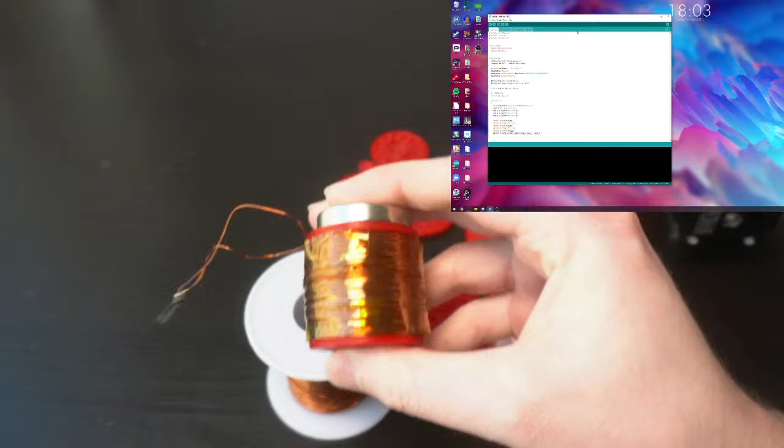So first thing, I guess, more coil winding. Where is my first one? So here's the goal, that is like 2100 turns. So I gotta make 3 more.

Luckily, Mr. Stepper Motor here is gonna help. So I've just got this hooked up to one of my OSR control boards, and it's just running a pretty basic script where I just tell it in serial how many turns I want, and then it spins. Zero control of speed or anything, so hopefully it's still okay. I don't remember which way it spins, so we'll figure that out.

And then, yeah, so I need to get some tape. And I think that should be it. Oh, I got tape, okay. My sound is no longer doubled, hooray.

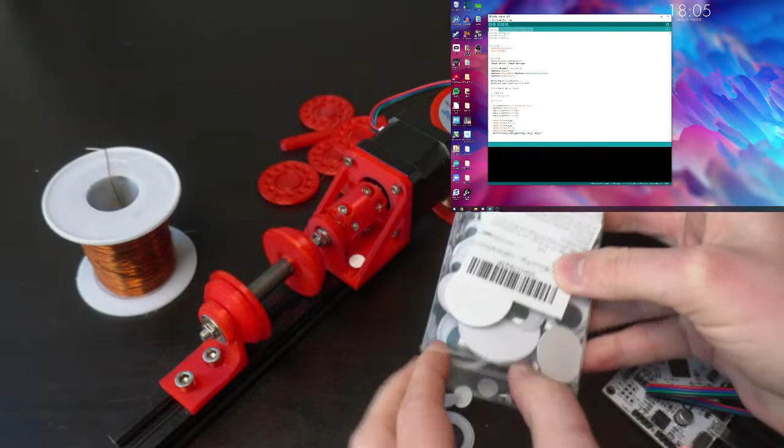Where's all the small ones? There we go. Okay.

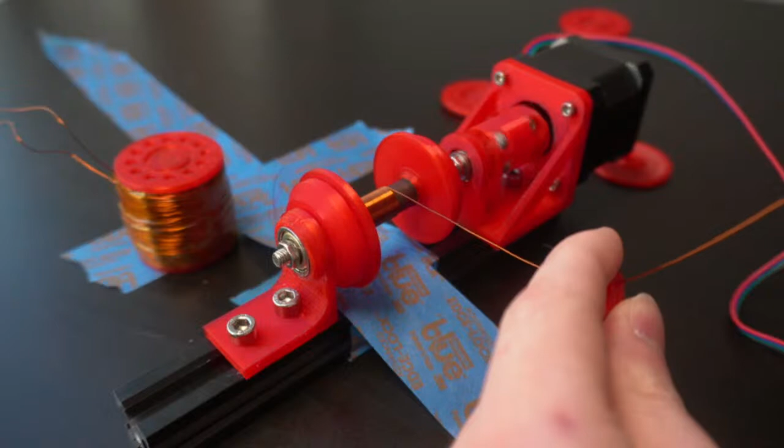Oh, that looks good. It's gonna be a complete mess by the time I get like 2 more layers up, so don't get your hopes up. I'm impressed I got it good for this long, honestly. Yeah, it's falling apart. Oh no.

All right, going for 500 more. It's doing its own thing. I tried. Oh, that right side looks so good. Wow. And then the left side is just a mess. It's fine.

I genuinely wonder how much that affects the efficiency of this thing. Like, if I could perfectly wind it, fully machine controlled winding, it's got to be better, but how much better?

Yeah, automated feed gate. I wanted to do that, but I honestly didn't even want to build this winding machine until I tried to wind a coil by hand and realized after half an hour and only like 200 turns that it really sucks. So this was the least amount of effort I can put into it, and yet I still designed these custom spools with this fancy interface because I wanted them to have flat ends for my application, which I guess I should explain too, because it probably isn't obvious.

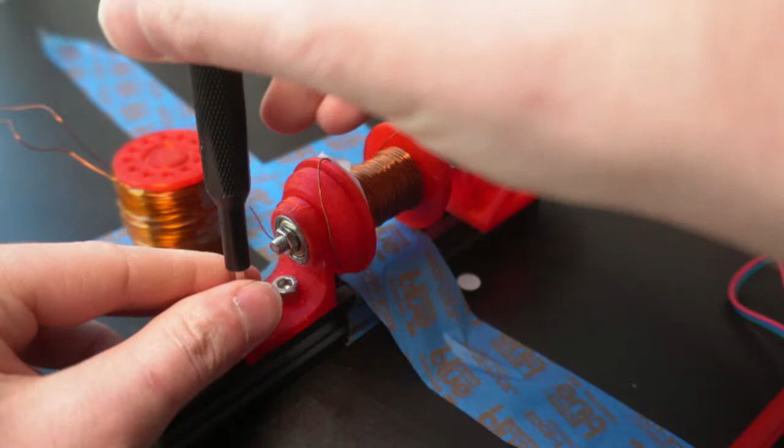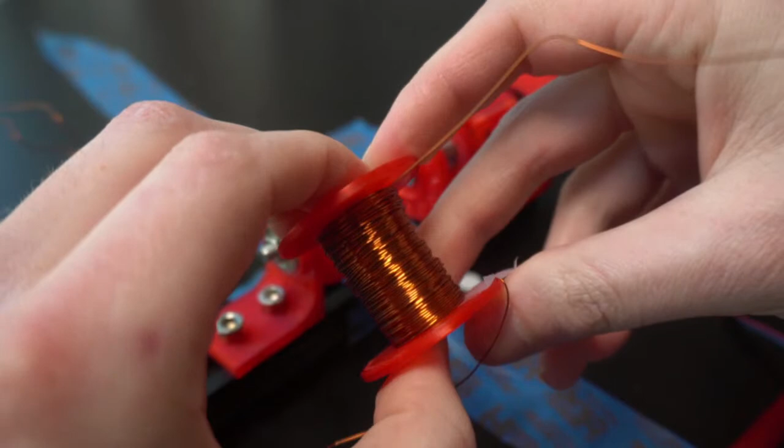All right, so now this thing is going to want to fall apart, because everything I build likes to fall apart. No, it's just because it's broken. Yeah, so here you can kind of see we're... yeah, this end cap just came off. So should I even bother trying to glue it now? Probably. Yeah, I shouldn't let my problems get worse than they already are.

Just gonna back this up a little. So now I gotta be a little careful because it will 100% want to expand because of all those tightly wound coils, and I don't want it to. Oh wow, that actually just ripped off the plastic. Nice. Alright, so I'm just gonna globby globby glob. This is how you fix problems.

Okay, we're going to let it dry in the jig. And we're going to drive from the other side so that hopefully the other side has a strong enough connection, or at least a slightly stronger connection.

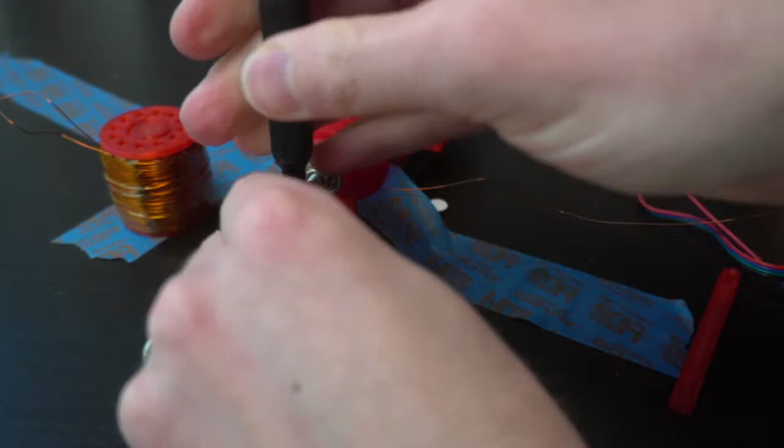Oh, cool, well thanks. I'm just doing my thing, but anybody can do this, honestly. It just takes enough dedication and time to learn and try and fail and be okay with lots of failure.

Take right now, for example. I'm failing, and yes I can recap what I'm doing. So I am winding coils for an electromagnetic levitation platform that I'm building from scratch, which is going to be like a fancy microcontroller version rather than the ones you buy now, which are kind of toys and are fully analog, zero control.

So yeah, we got a coil here, and we're just trying to match that. Originally I wanted to wind all 4 coils, but that is clearly going to take far too long. So we're just going to do this one, and then move on to testing it, and then some CAD stuff. Glue fixes everything.

Glue is glue. All right, so we are at 700.

I'm just going to do 1 and make sure it's now spinning the correct direction. Huzzah! And we should be good to go.

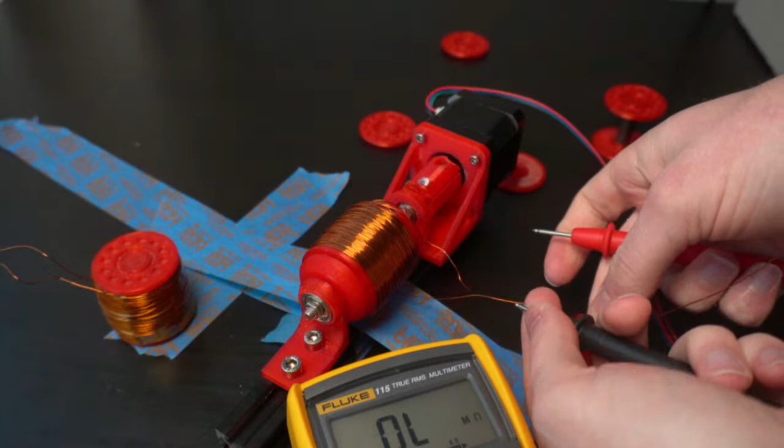What I was thinking was after I get this project going a little further and test a few things, and I'm pretty happy with it, I was going to move over to CAD. And then I started the rather ridiculous task of building yet another open source robot arm, because I want to build one to put a camera on, because I think that'd be real cool.

Alright, so this is a poor connection. I should just get a lighter and do this properly. There we go, 21.7 ohms. And the other one I have is 22 point something or other, 22.2. So 21.7 to 22.2, so yeah, we'll need, I don't know, I'll do 100 more winds and see where that puts us. That might be too many, I'll just do 50.

Knife's name is Knifey. You wish. Knife doesn't have a name, because I don't name inanimate objects. Oh, what a mess.

Man. This one could have gone a little better, I think. Oh no. Come on. This is the one place it can't be.

All right. So, you ready for this? Oh, actually, well, I need the camera to show the first part of this, but I'll pull this up. Alright, let's see if the camera wants to turn back on. Camera? No. Okay, well, you'll have to use your imagination.

So yeah, I don't know why, but last night I was just like, you know what, I'd love to build a robot arm. And yes, there's a ton of open source designs out there, but none of them were made by me, so I want to build one. That's honestly the entire reason.

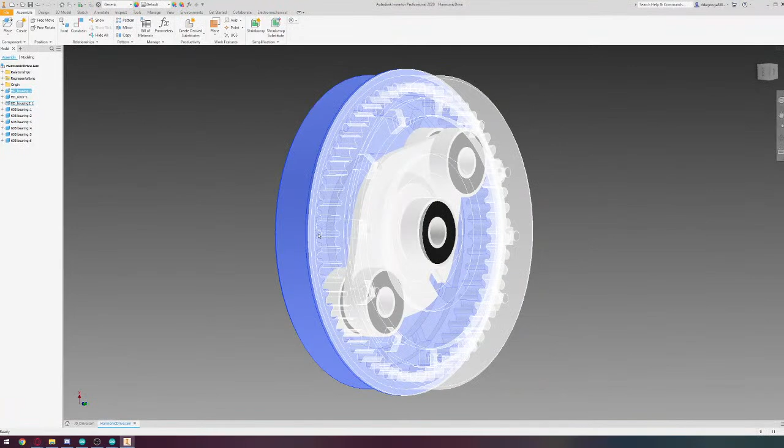So what I have so far is a harmonic drive unit, which is using, I forget what the name is, like the flex spline, I forget, there's an actual name for this. But anyway, it's a little hard to tell what's going on from this. But essentially the number of teeth on this one and this one don't match. This top one has 2 teeth more. Or wait, why does it have? Oh no, it doesn't have the same.

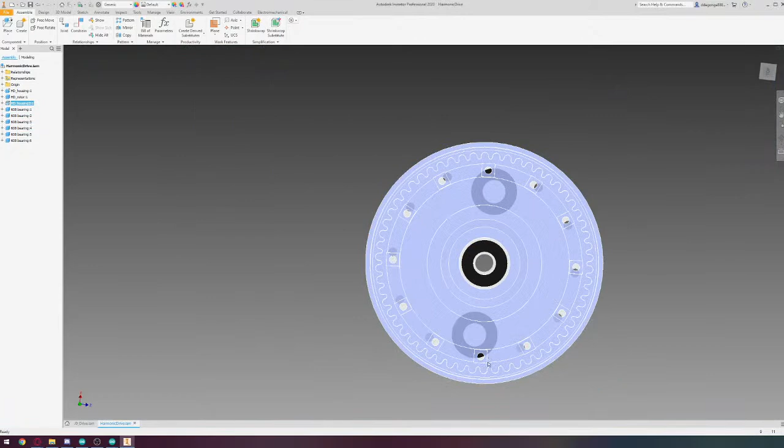Yeah, so, and then there'll be a belt here that's kind of inside out, so teeth facing out, and that belt's going to stretch around these 2 bearings. So as this input spins, you can see the teeth will line up as the bearing goes past, and then they'll misalign. And the output spins, I think it's a reduction of 29 to 1. So pretty good.

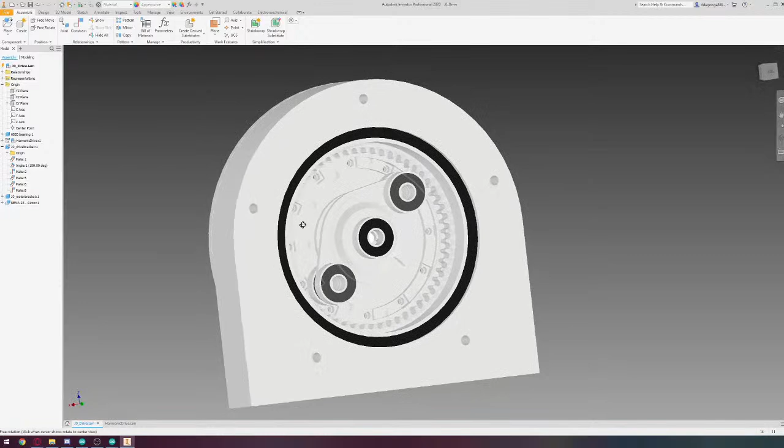And it's using pretty much all cheap off-the-shelf parts. It's a HTD5 belt, 608 bearings. The only kind of expensive part is we need a real big bearing here, which is a 6820, which apparently they're only like $15 on eBay. They must be really out of spec or terrible or something. But that doesn't really matter for open source robots.

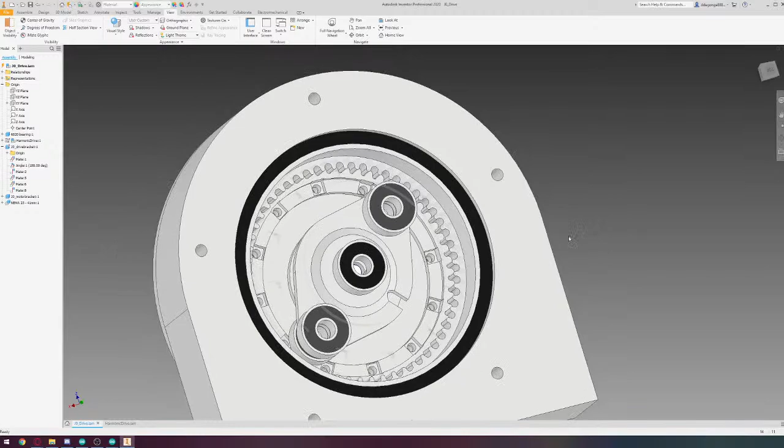So yeah, big bearing there. Have a NEMA 23 that's coming in here, and it's going to connect to the little funny shaped inner piece. Oh, I forgot, Inventor always defaults to no outline, so it's hard to see stuff. But yeah, NEMA 23 directly inputting to that spinning part in the center, and then crazy gear down. So it should be pretty good.

So this is going to be one part of the base, and then I have, where is it? Okay, I'll have to find it. And projects. Yeah, this project is called the OS ARM, because I have the OSR control board. So OS ARM, it's a pirate joke.

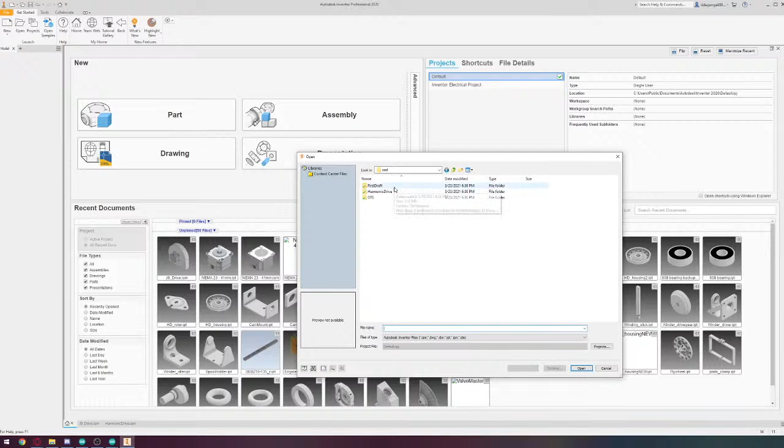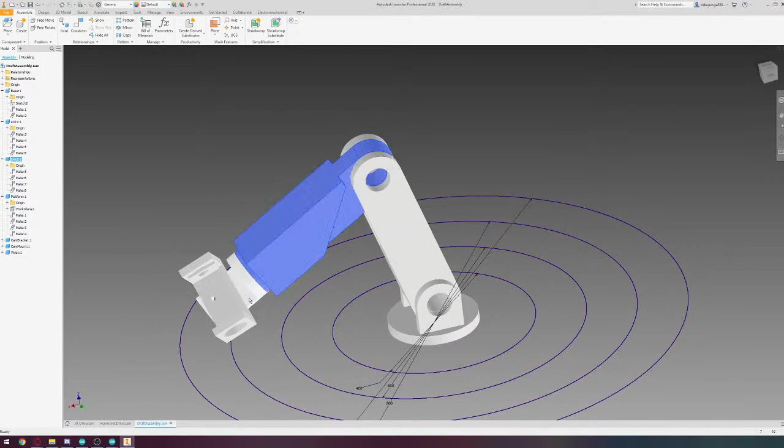Here is the actual mock-up kind of assembly. So I don't know if I'm gonna make it quite this chunky, because that's gonna be a lot of plastic. But the hope is to do like pretty much fully 3D printed, have a decent payload, maybe around 1 kilogram, a pretty good range, 500 millimeter radius. Actually, this is quite a bit further. I might scale that back a little.

And then it's going to be 6 degrees of freedom. So we've got rotational base, first hinge joint, second hinge joint, a rotation on the wrist, and then a rotation and a pitch here. And then the camera or whatever will be mounted here. And then this whole part from here on will be semi-hot swappable, so I'll be able to put on different tool heads if I ever have some other use case for this thing. And then I'm hoping that I can reinforce these parts with steel cables on the inside, so still keep it cheap and still have it be 3D printed, but be pretty strong.

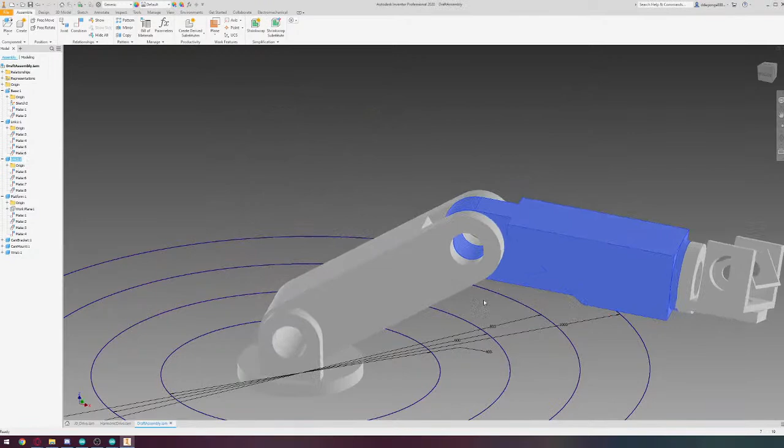And yeah, this is some absurd reach. I mean, I guess I can keep it and just only go this far, which will make the joints a little happier rather than going straight, but we'll see. I can always make these shorter. So yeah, anyway, the piece that I have now...

That goes here, so that'll be on one side, and then the other side is just going to be a much smaller bearing just for support, and then I'll put an encoder on it or something.

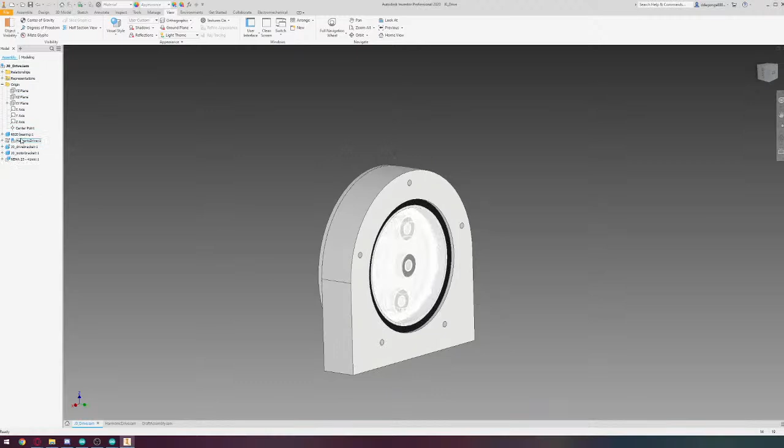So yeah, I have been master modeling stuff. Where is it? Oh yeah, the master models for each part. So yeah, this harmonic drive is master modeled. So I have this fancy sketch, and then I can change anything I want, and it'll just update all the parts dynamically, which is fun.

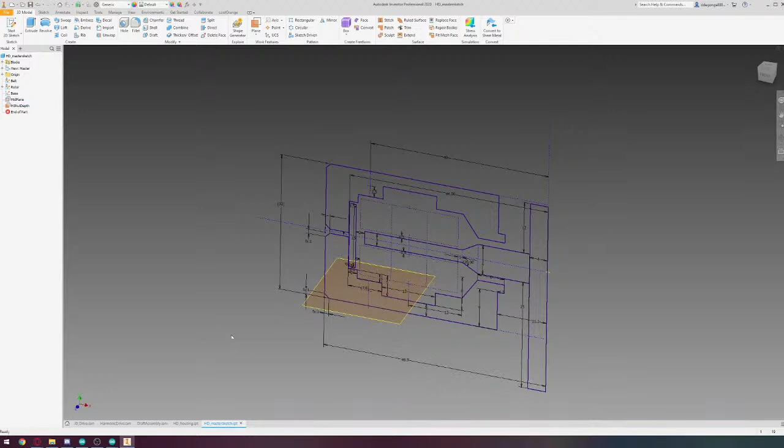But for this first draft of the full arm, I don't think I'm going to bother master modeling it, because I'm probably going to change so much stuff that it just won't make sense, and it's going to break every time I want to add a feature. So I'm just going to kind of wing it and see how it does.

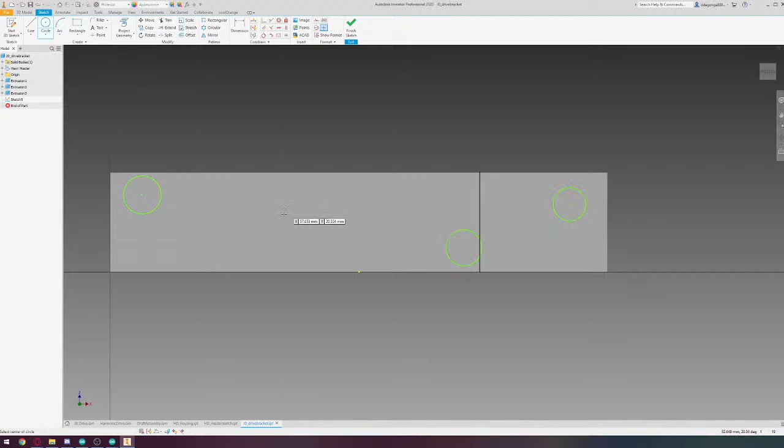Actually, you know what, first let's do a little more with this, because I would like to be able to actually test this on its own. And honestly, the first video about this arm is most likely not going to be the full arm, because I actually have other things I need to do in my life besides work on this arm nonstop. So I'm thinking I'll probably have like 1 or 2 joints, and we'll do as much as I can to make this gearbox, the harmonic drive, get it pretty well tested, figure out what the torque limits are, all that stuff.

So first, let's just quickly finish up this piece. So I'm just going to make sure these are symmetric with whatever arbitrary spacing I feel like going with.

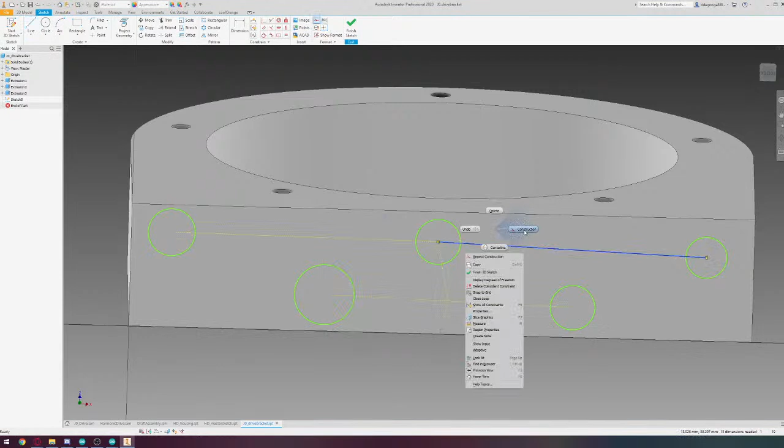Also, I CAD in kind of a strange way, I guess, so don't make fun of me. All right.

So let's just make all these for M5 bolts. That seems like a decent size. Yeah, I think that'll be all right. This middle one... no, that'll work. Okay.

Give these 6 millimeters of clearance all around. And then let's pull this down so it's centered. Okay.

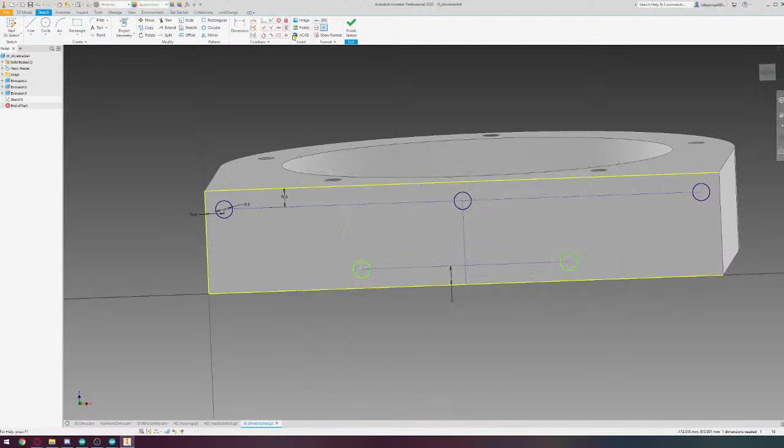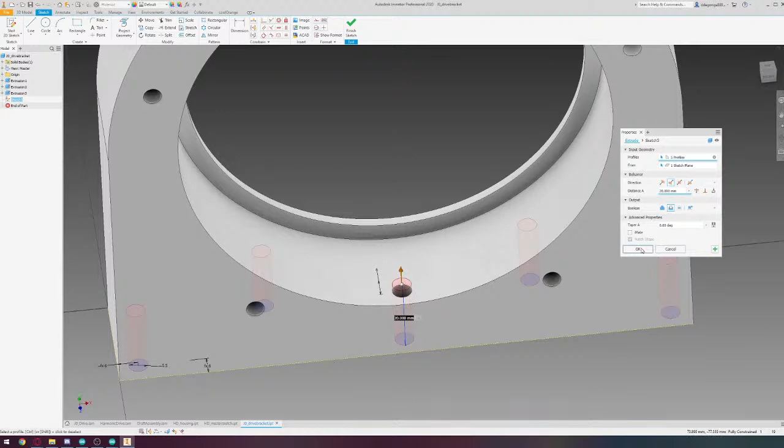And don't want these. So, all right, I don't think I want those going that far, so let's go with like 20. And then...

I can add the nut pocket. Yeah, I'll probably want to fasten these from the bottom, so I'm just going to add hex nuts.

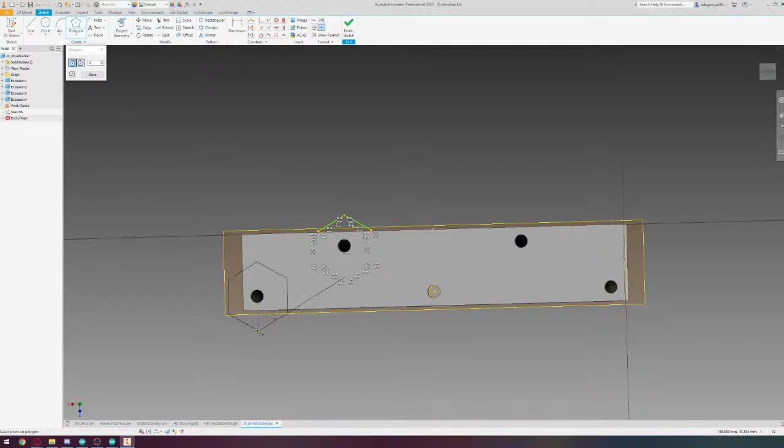Does anybody happen to know the size of M5 hex nuts offhand? I can look it up, but I don't know. I should remember this one. I'll just look it up.

This is the best resource. I don't know which one has it. Here. S 8. Okay, that sounds about right.

So give these 8.2, accounting for FDMiness. Let's get a better look. And yeah, vertical align all these.

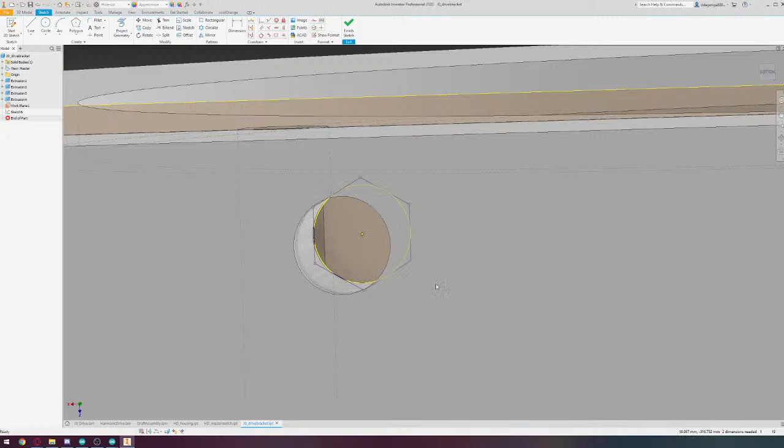Whoa, uh-oh. What did you do? What is it? What is it constrained by? Nothing. It's constrained by nothing. Okay.

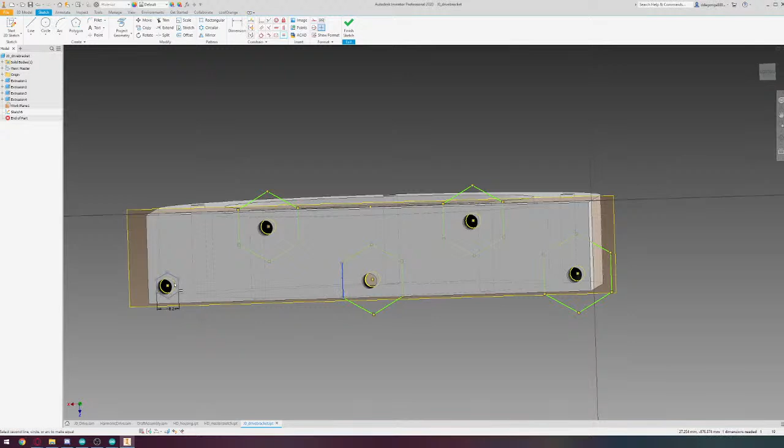I love when I accidentally place constraints without meaning to. What are you constrained by? Okay. You can fix anything by just deleting it. True story.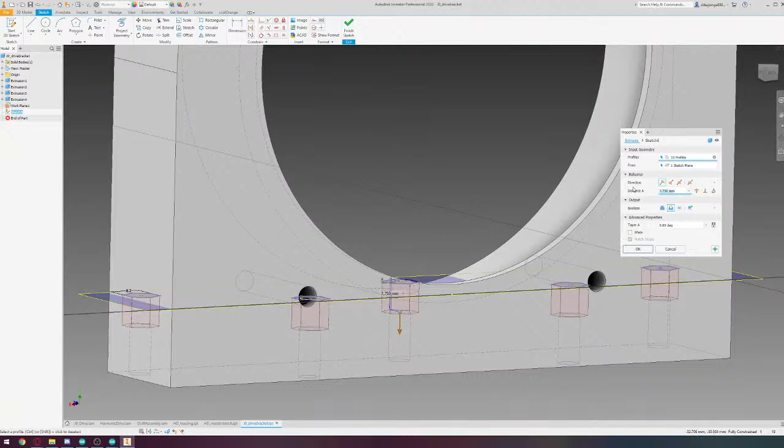Alright, so these are gonna interfere with those holes a little. So I'm gonna pull this down to be like 18mm offset, which is fine, I think it's still plenty. And I'm gonna have to add some cuts out to the edge on these. But first things first, let's change this to -18. Let's change this to 18.

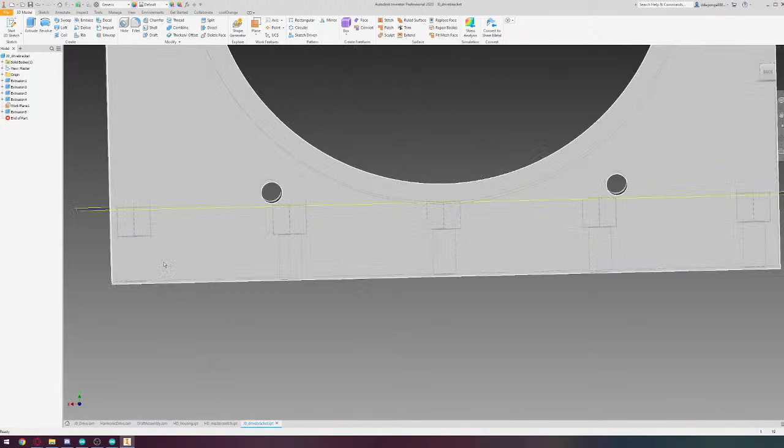Yeah, that'll be fine, first prototype, it's not going to be perfect. That's not what I wanted. Okay.

Alright, so this one's accessible. These guys are not, so I'll just pull them all out the back. And this guy out the front. And this one out the front. And we've got some... what are these guys doing?

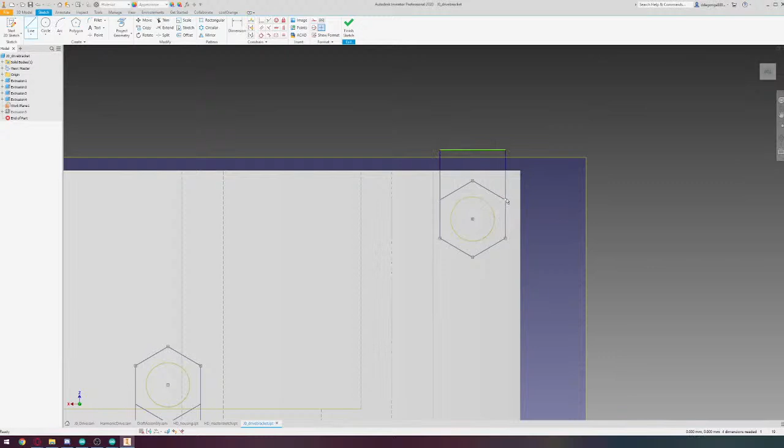Yeah, I need an official quote book. It'd be just filled with nonsense.

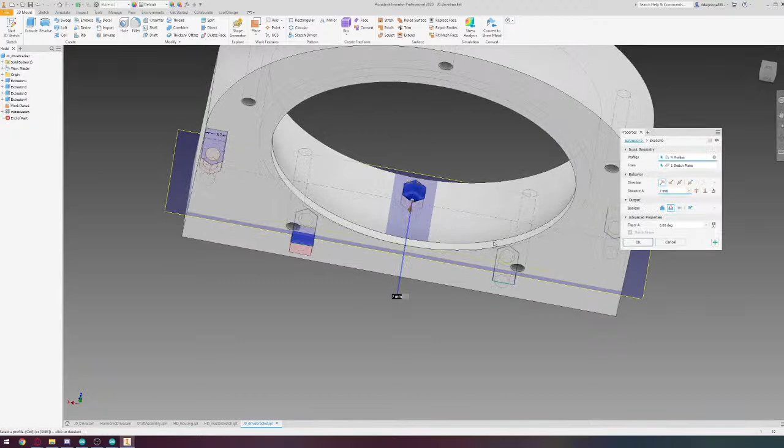All right, these are going to be fine. I know my lines were not constrained, but again, first draft, this doesn't matter. Okay. Oh, that little...

Projected line running through, cut it. Okay, well I think we're good.

I should probably figure out how wide M5 nuts are. And that would be 4mm, so make this 4.5. Yeah, and that's good.

I'm actually going to make this -16 so I have some space after. And okay, first draft, so I'm allowed to do weird things. Okay.

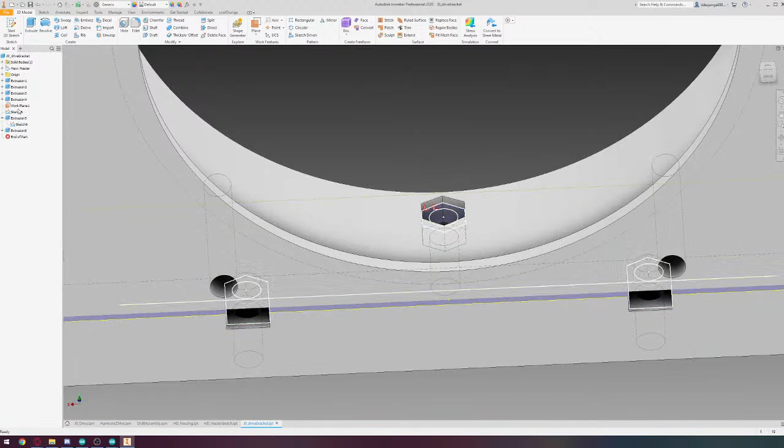Cool, so we have a way to mount this, which is good. And now let's build quickly a test arm just to make sure we have the mounting pattern right, and then we can build the first arm. So we're going to be building this first link, or at least the first draft of the first link.

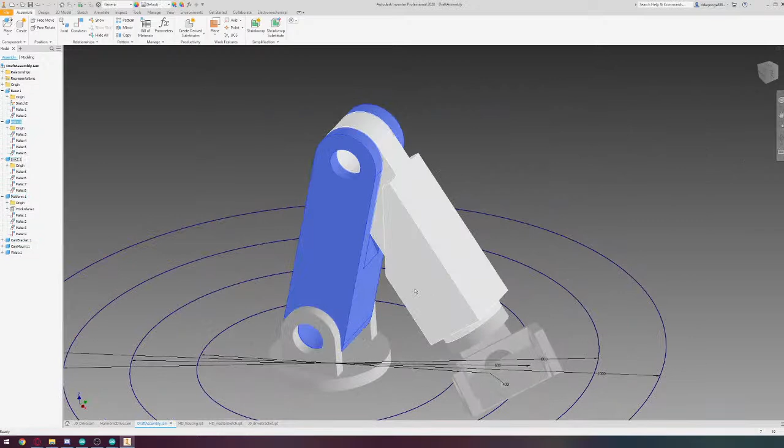All right, so we are mounting it to this face, which has, I believe, 12 holes, and they are 40 millimeter diameter. Okay, that's easy.

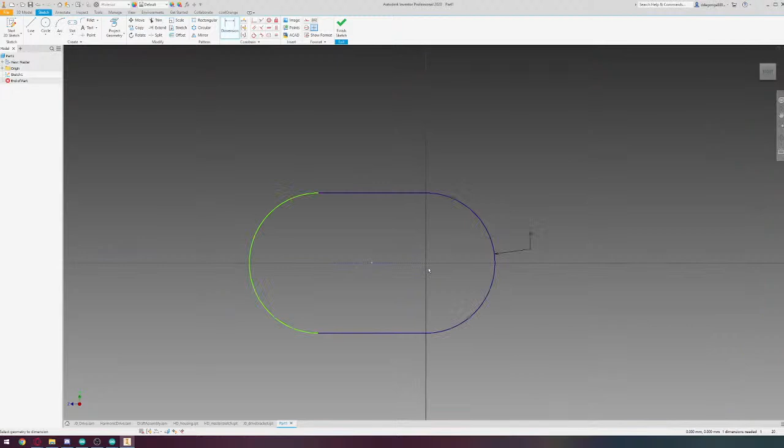All right, so let's just build a little test load arm. It's just gonna be a slot, and we need more than 80, so let's say 90. Ooh, this is a radius. Okay, and how far is this? That'll fit on my print bed, just barely.

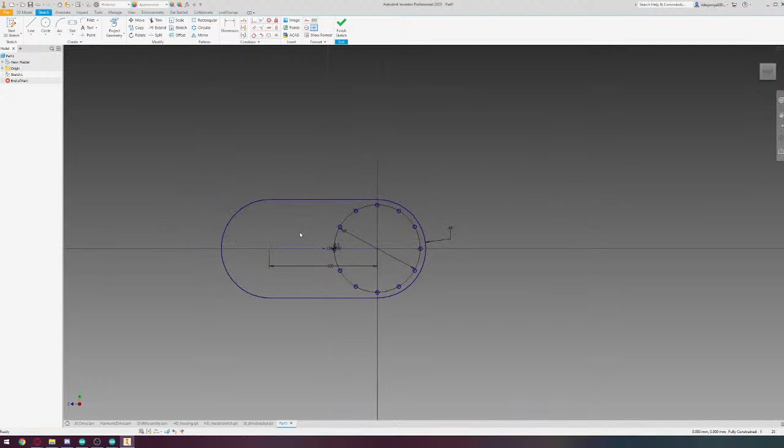And then we've got the mounting pattern, which is going to be here, 12, good, done. This is kind of a waste of plastic, so I'm not actually going to do that. I'm just going to... no, I'll keep you. Pull you around, pull you around.

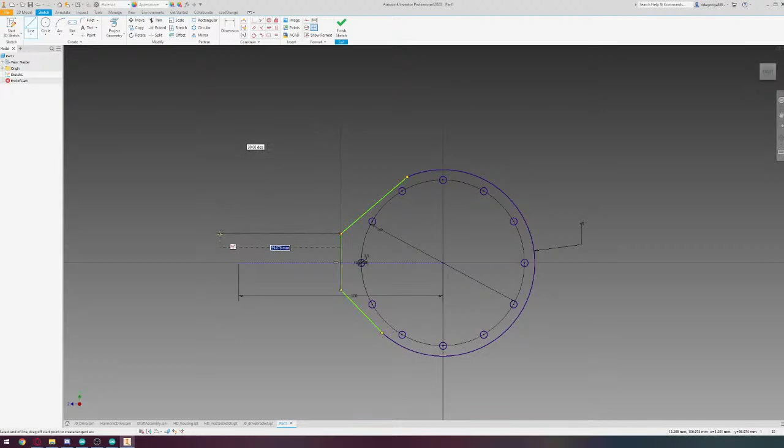Yeah, I think that's fine. This, I mean, how much torque is this going to have? Probably a decent amount, so. We'll add a little hole for hanging stuff from. I don't know, I think that's pretty good.

I will constrain this to the center. I will tangentify. Yeah, I'd say this is a pretty good little test arm. Yeah, that's good.

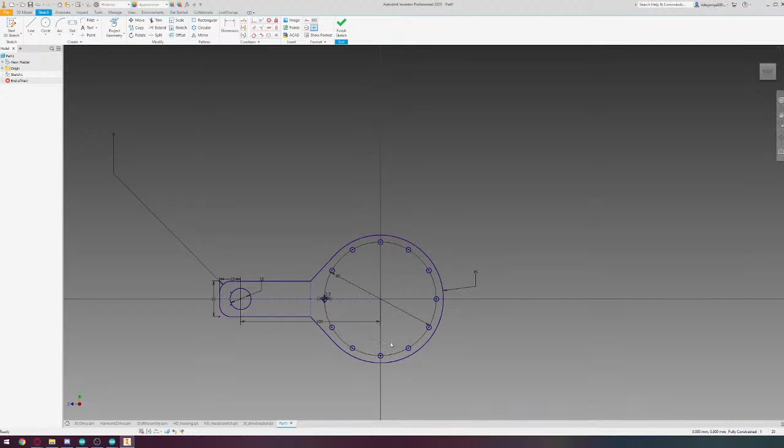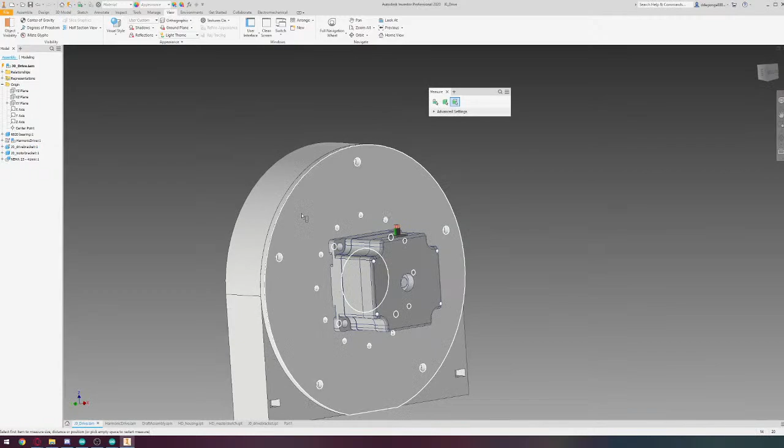And I think it's going to need to have this cut back a little because I'm pretty sure the mating face is set in. Yeah, it is. Not too far. These holes shouldn't have any bolts coming out this side. They're just for attaching the motor plate. So, 1.5 millimeters, so I'll give it like 4.

So we'll just cut 4 millimeters in, and then we have our little testy piece, and this is a 100 millimeter arm. So, how much is this going to lift? That is the question.

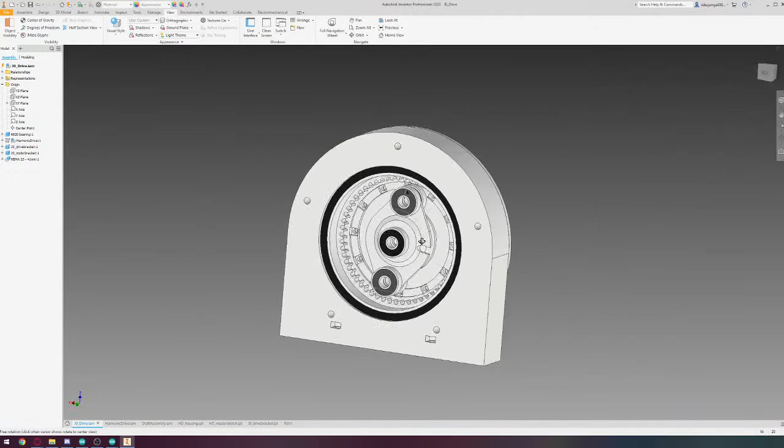I don't know, honestly. I don't have enough weight around here to hang on it, so I'm probably just going to have to use a digital scale, and oh, I can get one of those little hanging fish hooks and pull on it. That might be what I'll do.

But yeah, so the main thing I'm going to want to test with this is total torque carrying capacity, and then more importantly than that is backlash. So total torque will at least tell me how heavy or how light my arm has to be for it to not completely fail.

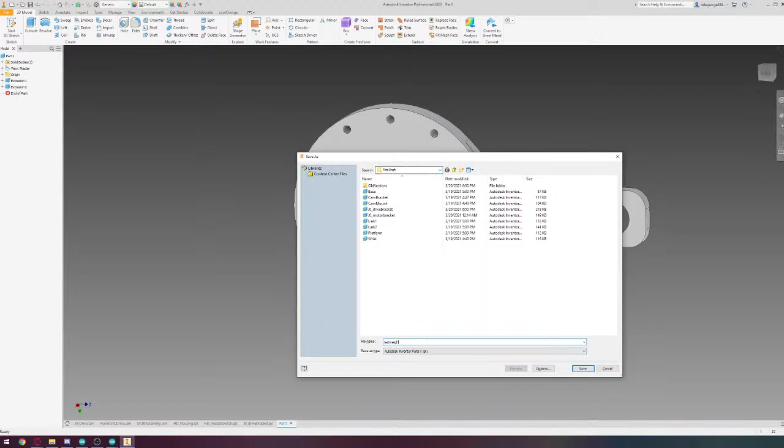And then, is this first draft? Yeah, I guess this is first draft. And then backlash is more important because backlash is going to be super annoying. I do plan on putting encoders.

Where is it? Here it is. So I plan on putting encoders at each joint at the actual driving interface rather than the motor side. So I should be able to see all the backlash, but still I don't really want to be compensating for all of it all the time because that's just real annoying.

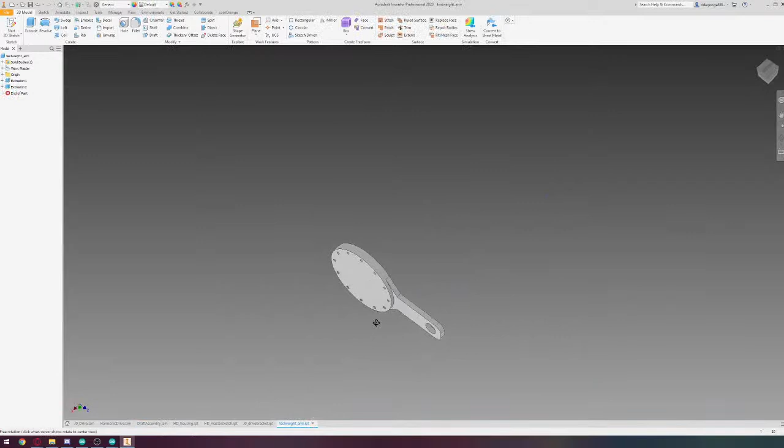Okay, so we got the arm, the little test weight arm. I'd say that's good to go. Let me just throw it in here just to make sure. Might as well.

Okay, and it will be concentric. No. Okay. Yeah, that should be fine. So it's just gonna sit off to the side and just lift. Good.

All right, I wonder if my camera's cooled enough. Let me see if it has, so that we can finish up over here. So one moment. Let me also see if I can find that temperature setting real quick.

Darn, I don't see the temperature setting. So we're just gonna have to go until it overheats again. All right, so let's see if we can get this back up.

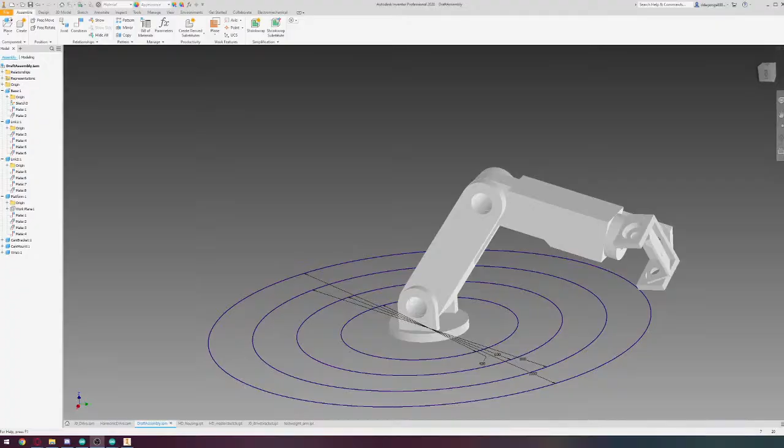So the camera's pretty cool, so we should have at least like 20 minutes before it cuts out again. All right, so we were about half an ohm short, so we needed like another 50 coils, but this got all tangled up. So I just gotta try to pull it back, which looks easy. I wish it was easy. All right, I'm just gonna give it a ton of slack.

Man, at this point it might have been easier to just wind it by hand.

Okay, cool. I got it all off of the motor shaft, which is the important part, because that would mean I couldn't actually take this off if I couldn't. So there's going to be quite a few dangling coils. Oh well, all right, we're good.

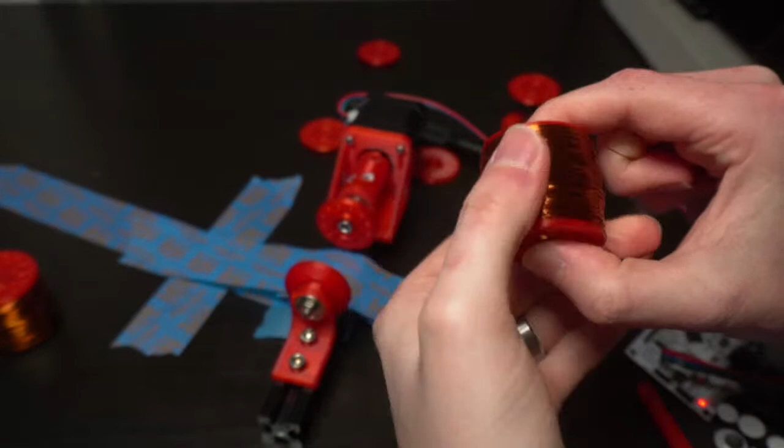All right, good enough, good enough. Now I need to keep tension on that somehow.

Tape, where's the tape? Uh-oh, okay, there it is. All right, let me find the Kapton. Here it is.

And this was so much easier when it was actually still able to be wound on the machine, when I did the other one, because I was able to get this on pretty tight. But...

Something smells like it's burning. I know what that is. That's the reason I built a V2 of the OSR control board, because V1 used a linear regulator to step down my supply voltage to 5 volts.

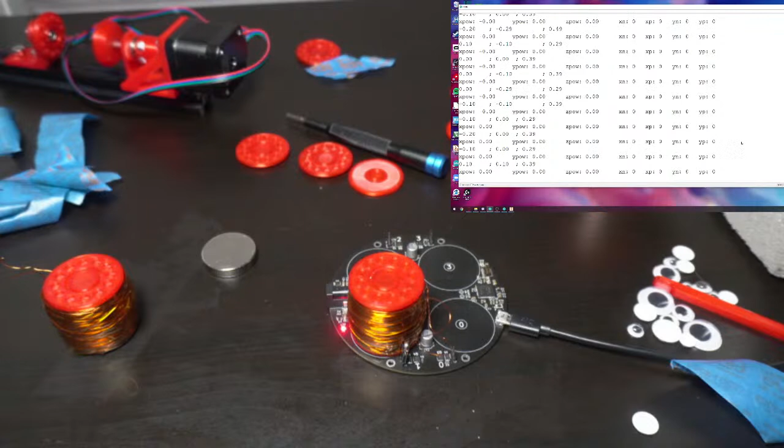Okay, no idea if you guys can read the numbers, but currently it's not actually powered with DC power, it's just USB power, so it's running the microcontroller. There's this XPOW line, that's part of the control loop, which currently isn't really doing anything, which is okay because the Z power is too low.

But ignoring that, the line below it is just the raw magnetometer readings. So we've got this one which is going to change the X value significantly, this will change Y, and then Z is, of course, height.

So the original plan was to have the coils on top here, and have this magnet floating up above. But as you can tell, the Z reading of the magnetometer up here is only like 1 tick, which I don't know the conversion to Teslas, but it's pretty weak. I don't think it'll be strong enough to actually get a good reading up here.

So the alternative is to either mount the coils on the bottom or just flip this whole thing over. Leaning towards this because there's a ground plane on the bottom, and I'd like to not mess with the field too much reading this magnet. I don't care if it distorts the field coming out of the coils, but I want a good reading of where this magnet is. When I do this, I'm reading the same height above the coils, and I'm getting like 12, 13. So this should give me a lot better resolution and hopefully not break everything.

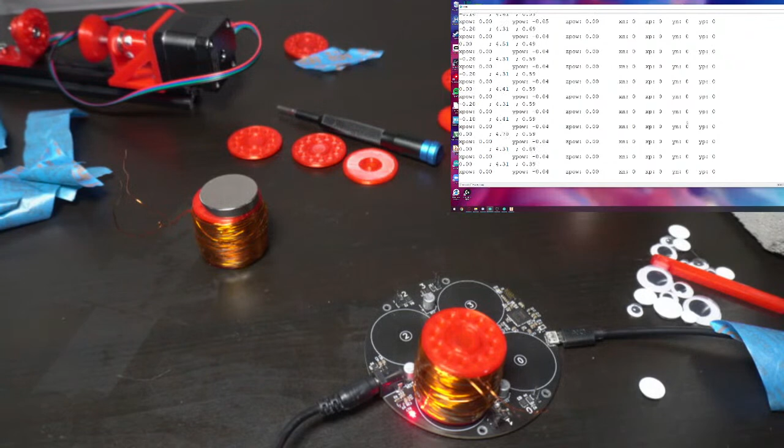This board's also using my newer setup, actually using a switching regulator for 5 volts and linear for 3, so it also stays pretty cool. Really cool, actually, it doesn't get hot at all, which is nice.

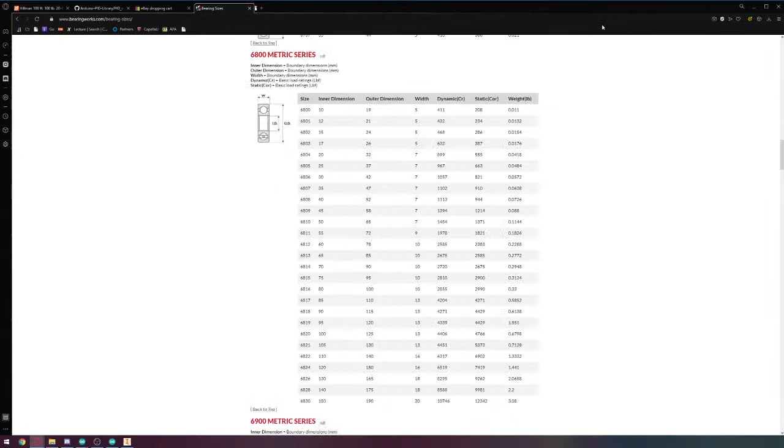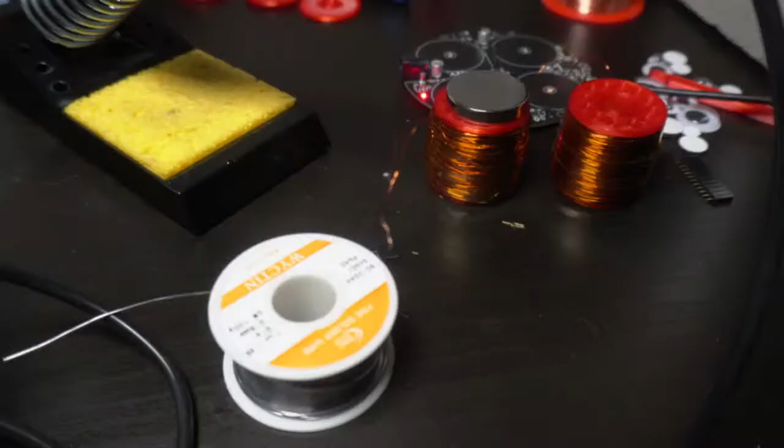Okay, we should be good. So hopefully this won't shut down again. I think it'll be all right now. Let me move this mic because that's far away.

All right, so goal here, we're just going to be soldering up this little connector to the newly wound coil, and then we can go ahead and plug it in and test out one axis, maybe two axes of the control loop. We will see how it does.

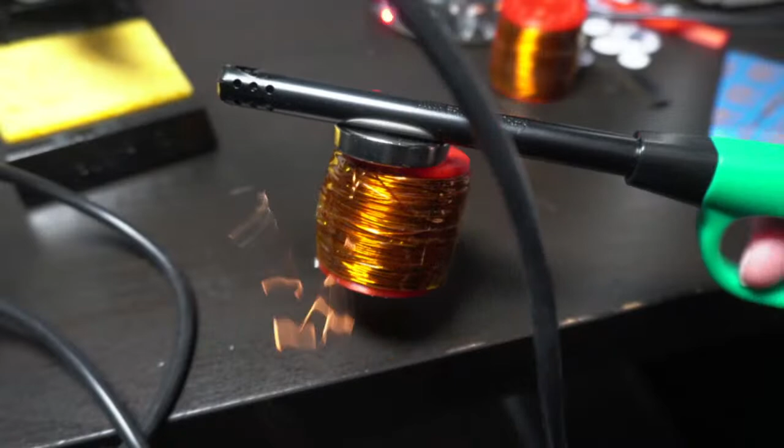Okay, that's why it was hard to get a resistance reading. There's still a lot of enamel on there. Where's that lighter? Yep, there you go. Okay.

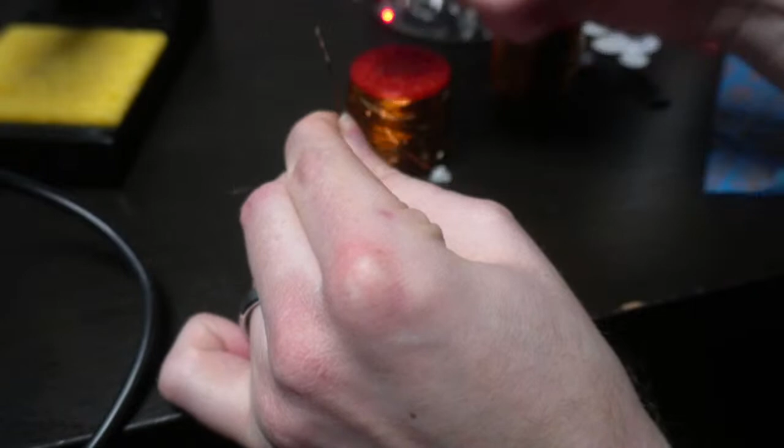And wire does get hot. Clean that off. Oh, sorry. Okay, much better. That's nice exposed copper. So let's actually figure out what this resistance is, because I'm kind of curious.

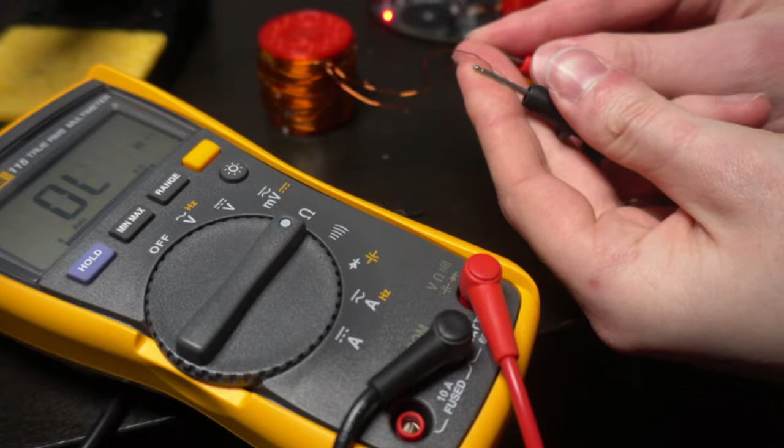Here. Okay, that makes more sense. 22.7. I'm pretty sure that was what it was before I hand wound a few, but that's fine. Lower resistance is more power anyway, so nobody is going to argue with that.

All right, so let me just trim down the exposed part to be a little less. And soldering iron's on. All right. Now the annoying part is soldering without one of those little helping hands things, which I'm realizing now I solder enough that I should probably just buy one. I used to have one, but it fell apart, and I refused to replace it.

Let's just tin that. Come on, stick. It's doing a little. Oh yeah, I turned this up for soldering a ground plane. Let's go back down. Okay.

And let's tin these, which are the easier ones. Okay, and now, will it stick?

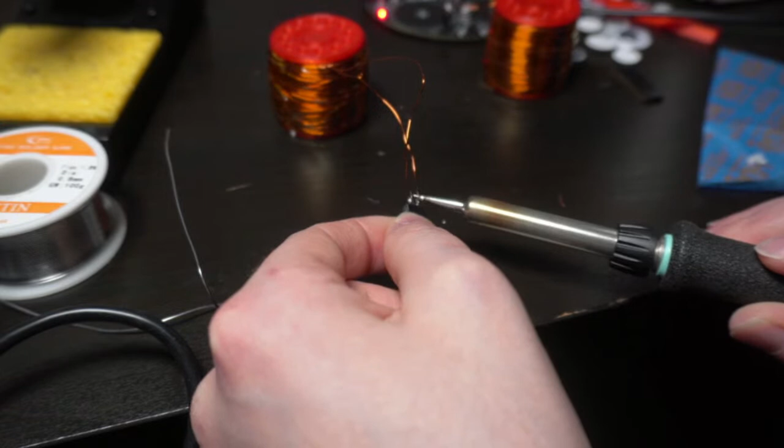That one's bad. Okay. Does not want to stick to this one. Yeah, this is what I get. All right.

Flux helps. Oh, I do have flux. I mean, this has supposed flux, but it's like the cheapest solder I could find on Amazon, so that's not helping. There we go.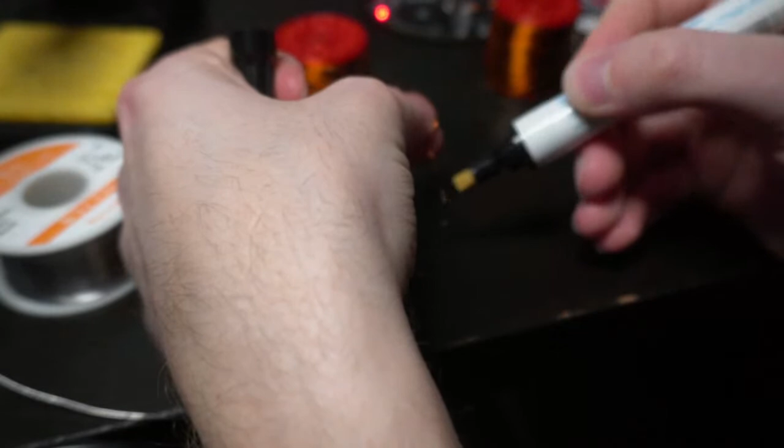Woof. Not touching after I clean it. Well, that's no fun.

Let's try to do the trickier one first. Is that bridged? Not anymore.

That's pretty good. Okay, happy with that one. And this guy should be pretty easy. Okay, yeah, great, good, done.

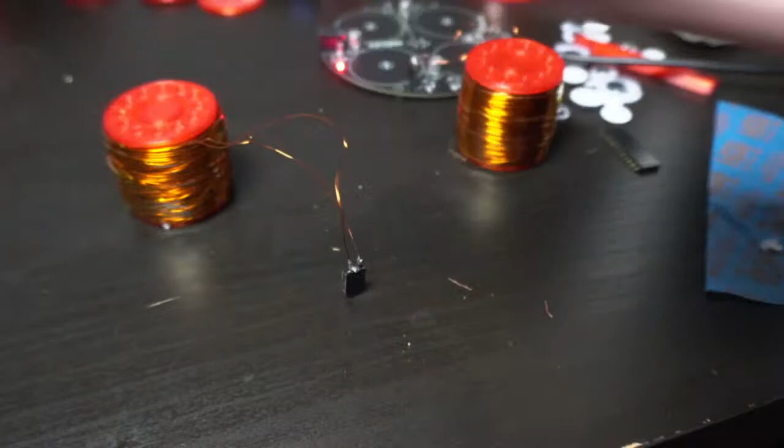All right, so we have 2 coils. Let me just make sure that it is not shorted, because that would be a very bad day. It also wouldn't be the first time that I powered on something that was shorted that I should have checked.

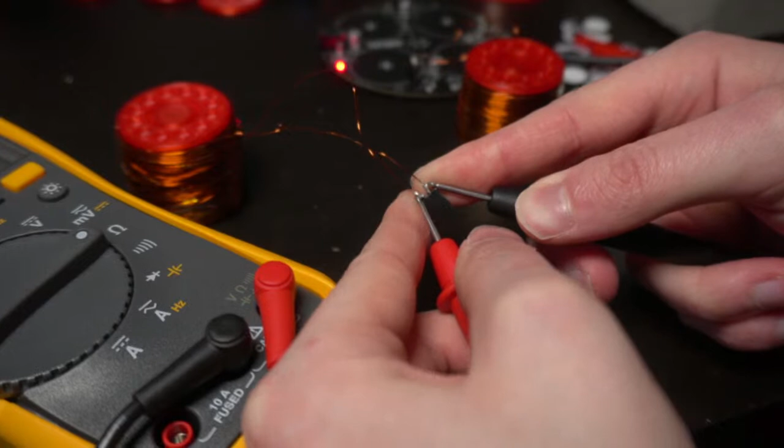All right, so let's go with the most likely actual layout. So this will be 1 and 3. One of these may, yeah, only, we'll see. I might have to flip one if the polarity's wrong.

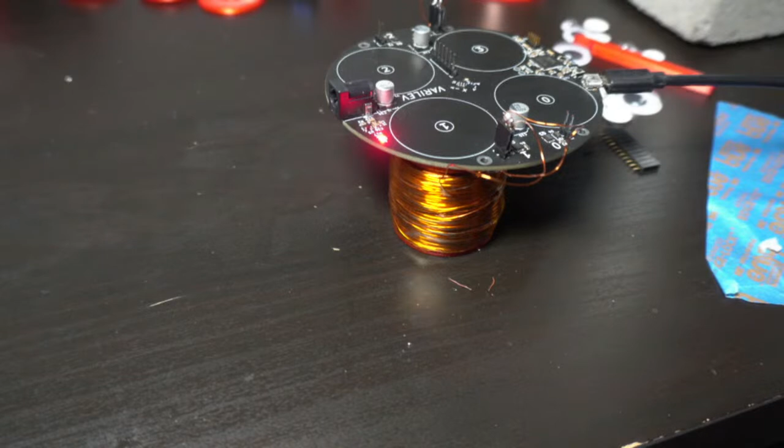Use my helping hand. Yeah, I know, I will. Not sure if you were here before, but I had one and it broke. They always seem to break because the hands are just like cheap crimps. So I was protesting it by torturing myself.

All right, let me fix the view a little. There you go, focus over there. And it doesn't seem to be overheating, so I think that setting is working. Power, it's buzzing, not blowing up. Good.

That's repelling. That's repelling. That's good. Let me make this bigger.

I'm also going to reset it. I'm pretty sure I have a memory leak somewhere, because it really bogs down after a little. Which one was I using? Not this one.

Yeah, much faster now. Okay. So, it's sensing it. Cool.

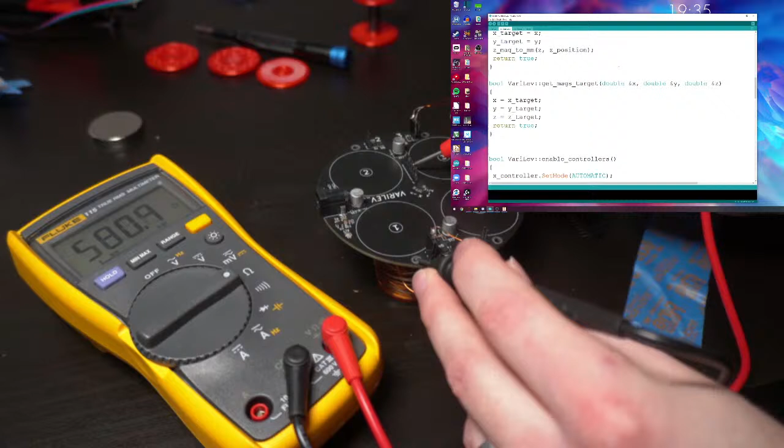Let's see what those are supposed to do. Unplugging coils while you're testing. Yeah, well. I probably should have.

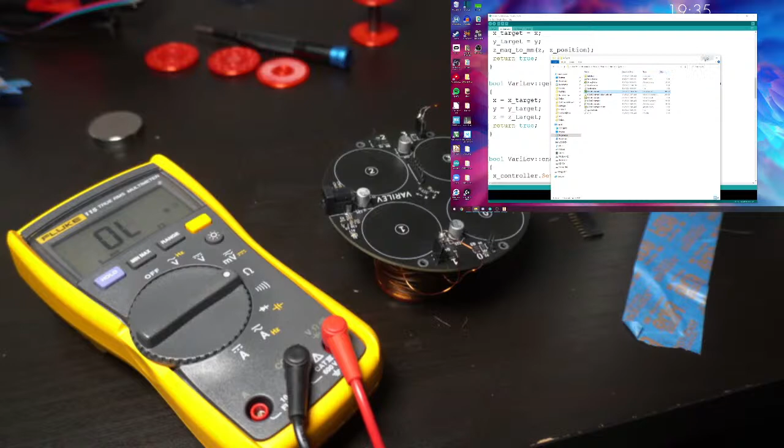Okay, so these are supposed to be ground. Oh, these are supposed to be 3 volts. So, for some reason, the 3v3 line appears to have gotten pulled to ground just a little.

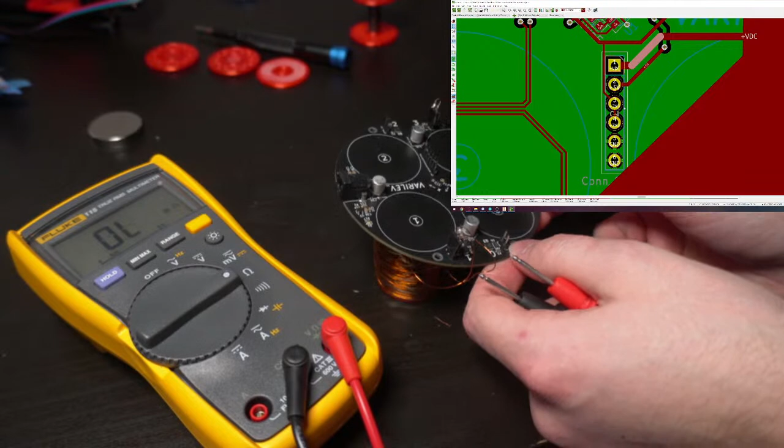Yeah, 11 ohms, and that's the same one, so it should be 11. Yeah, so 11 ohms to ground. Maybe I just busted a component, but no, I probably shorted something bad. Well, I'll have to look a little closer at it. Maybe I can save it, maybe not. Either way, that was fun.

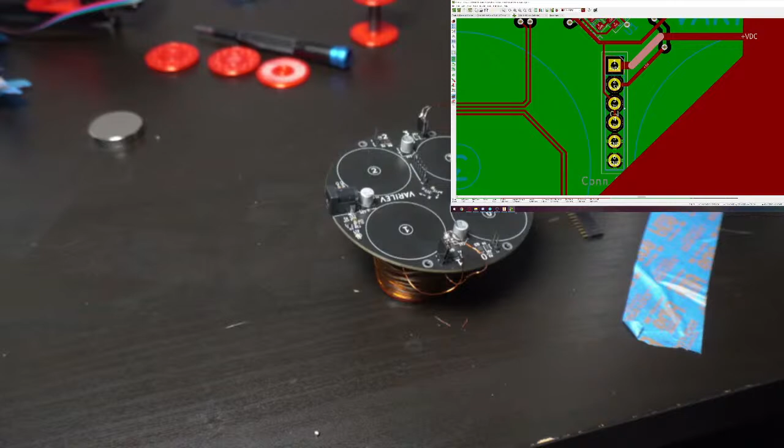Alright, so I think I'm going to wrap up this live stream while I debug my board and wallow in sorrow. Yeah, we'll see, hopefully it's an easy fix. Like, I don't know, this board's not all that complicated.

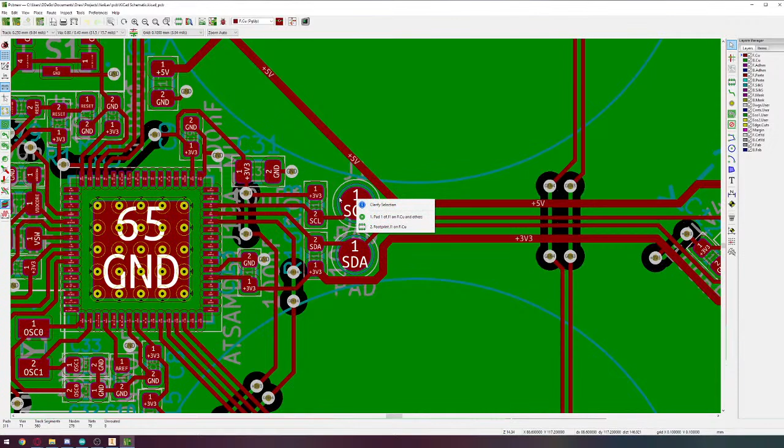Yeah, so I was just checking these two contacts, ground and 3v3. They're not supposed to have a low resistance between them, but they do now after dropping it. The magnet landed in here, flipped, and it landed on this coil, as magnets do. And what could it have shorted? I don't really know. Like, I do have these pads exposed, just in case I had to tap into it, I wanted to make it easier. Not realizing the magnet was conductive, and would just bridge stuff.

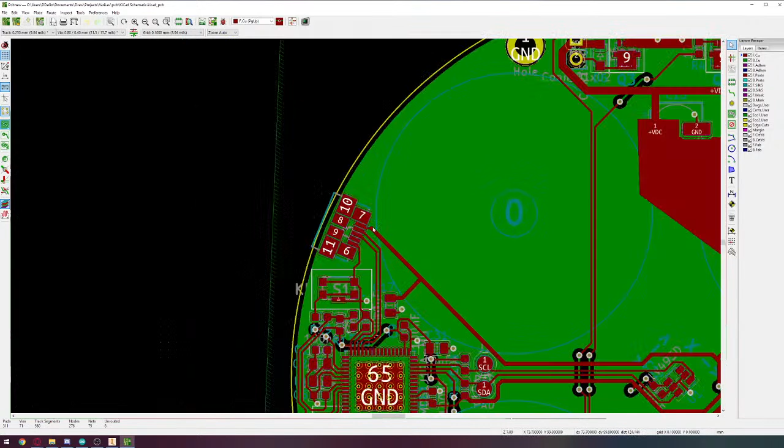But all I can think of is maybe, no, I don't even think I could have hit the 5 volts on the USB, because that's kind of covered by the connector. Oh, I probably hit the 12 volts here, and maybe connected that to something. We'll see, maybe it just squished a component too and shorted it.